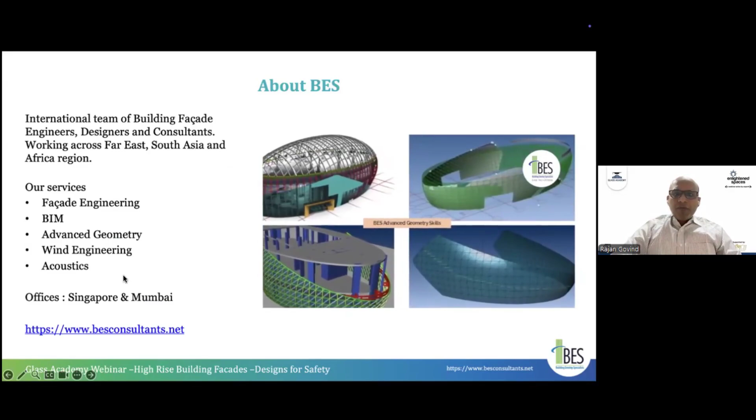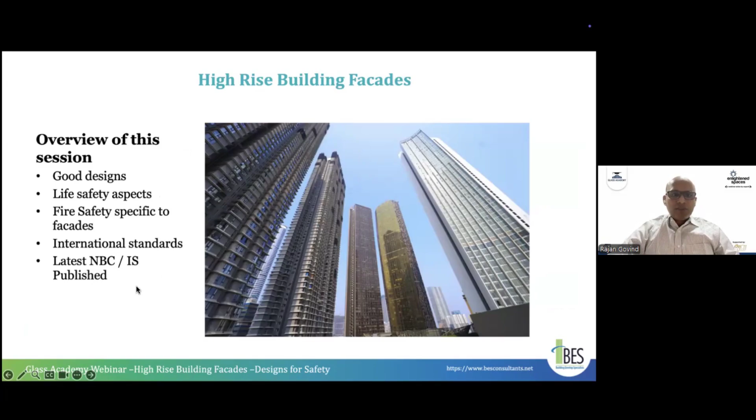So switching on to the topic of building facades, what I try to capture in this session, as much as possible, is the safety aspects. What is called a good design, and some life safety aspects. What is fire safety specific to facades? I will try to show some standards, which is a local standard, and how it compares to other international standards. So understanding safety has several aspects.

Safety is not just from a structural engineering point of view. Safety also comes in many different forms. It's human life safety. When we say safety, the first thing we realize is structural engineering, which is driven by the wind forces and connection design, especially for facades, and it should be structurally robust. The design should be robust.

We also see a risk in falling objects. Things falling from high-rise buildings pose a risk to the pedestrians, occupants, or the surroundings. And occupant safety, which is about protecting the occupants and users the building is built for. And another important aspect is fire safety.

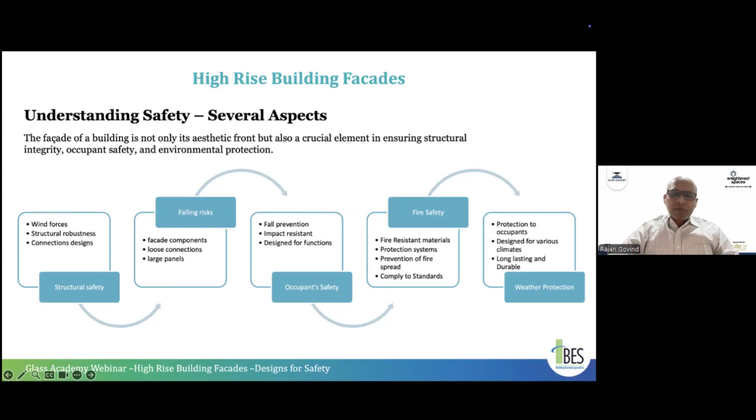With fire safety, we often hear about problems with building fires, and sometimes people have a perception of fire risk on the facades. And we also try to capture some of the weather protection, so how the facade is helping to protect against weather challenges.

The first thing on the facade aspects, we all talk about structural engineering. The structural engineers know the major predominant force on the building is the wind. So wind is a natural force, and it has a huge impact on the structures. So the better we understand the wind, the better the designers can design.

Often people see the wind as only happening on a high-rise tall building. So if you design a low-rise building, single-story building, ground floor building, maybe it's okay, I can compromise the design, the wind is not coming to the lower level. Which is not the case.

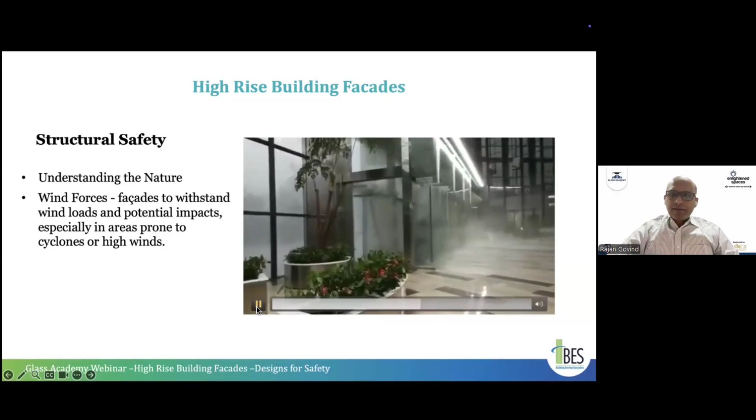Okay, so sorry for the noise. So the video clip is showing the impact of the wind. I can just now mute this so I can replay this.

You can see the wind is on the ground floor entrance of the building. So things get blown away. The doors are falling. The glass is breaking. So the phenomena of the wind is huge. So it doesn't matter if it's only a high-rise building. It is on every building.

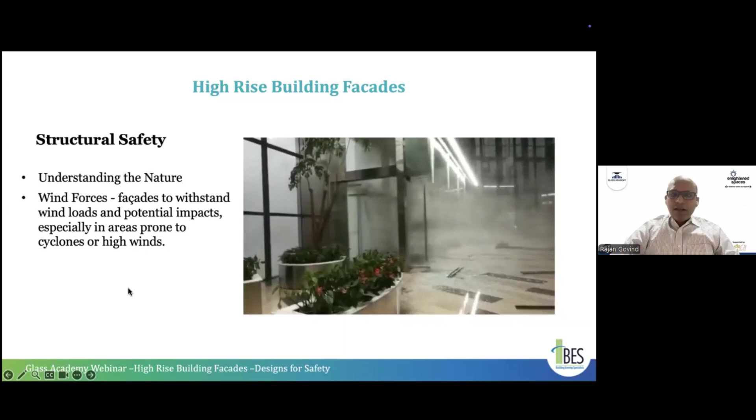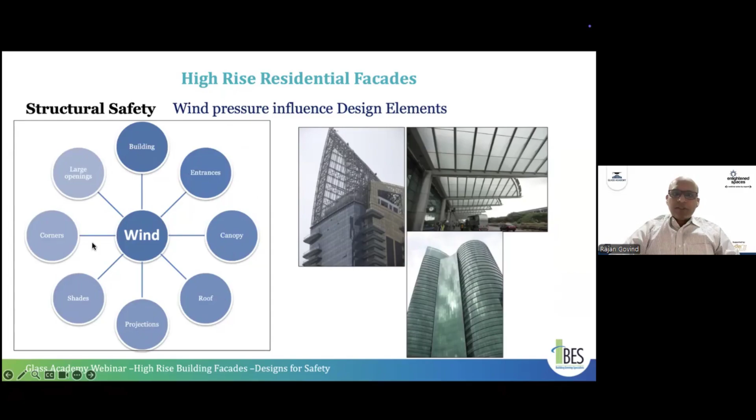The wind also creates a lot of other secondary impacts on the building on various locations such as entrances, canopies on the entrance, roof, terrace, projections. As we know, a building with a lot of projections attracts a lot of wind, shadings, corners, large openings like refuge terraces. On high-rise buildings, we have a lot of balcony openings, double height spaces. So this gives a huge challenge for designers to understand various aspects.

And for complex shapes, we also use a simulation based approach. The simulation based approach is good for complex buildings, where it can give a much better understanding of the wind forces on various parts of the building. For wind forces on a complex building, the simulation approach is also very well referred by NBC.

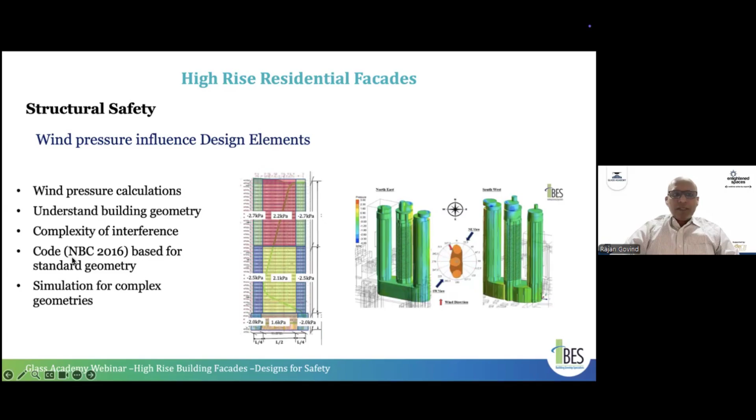In structural safety, we should also take care of fixing and connection. When we design for engineering, it is not just that we have to design a glass or cladding and member. Safety of the connections is very important. The facade elements are held by these brackets and fixings. Maybe the panels or one piece of glass may fail, but the bracket system fixing cannot fail. So there's a greater emphasis on fixings.

As a general good principle, you should transfer the load directly. You should be structurally efficient, and it should be designed for movements, rotation, all sorts of other impacts. Ease of fixing: it cannot be too complex for the person who is installing at the site, and the ability to interface with the building in a much cleaner manner so that it doesn't impact the architectural design.

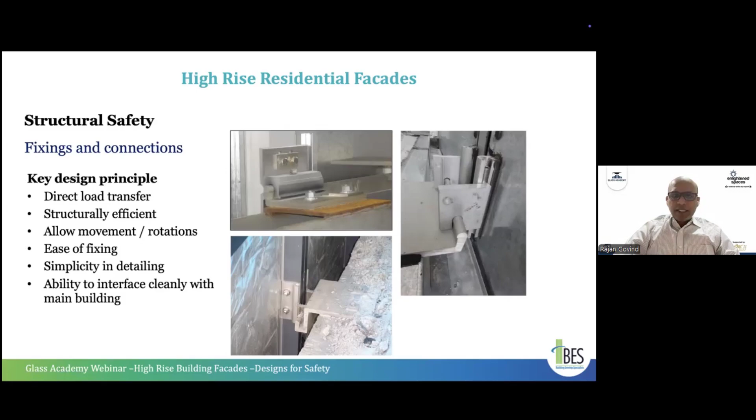And so we talk about a lot of fixings and connections in the bracket, because the facade is nothing but connecting various different materials together. So we always have a lot of different connections to deal with. And this fixing and connection should be designed to take care of the tolerances, whether a concrete building or steel building, how much tolerance the building has.

The framing system and fixing should be designed to take care of the tolerances; there is always a tolerance. So it is not as we design, as we get on the site. So the fixing and design detailing should take care of that.

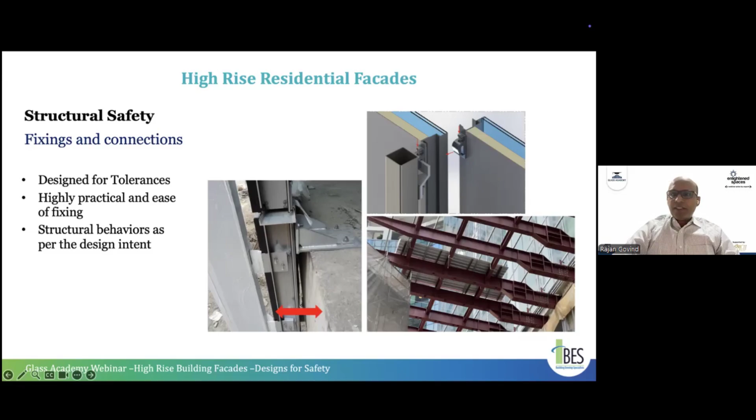And especially for high-rise buildings, we face challenges of inter-story drift. It's basically the building swaying due to seismic activity or due to high wind. The design methodology and factors are clearly given in IS code 1893. Generally we design the sway for H over 500. H is the height of the individual floor, and 500 is a factor of safety taken care of to design the joints.

So as the building is swaying this way, a joint movement has to be designed. Especially a high-rise building is not stiff. It's slender.

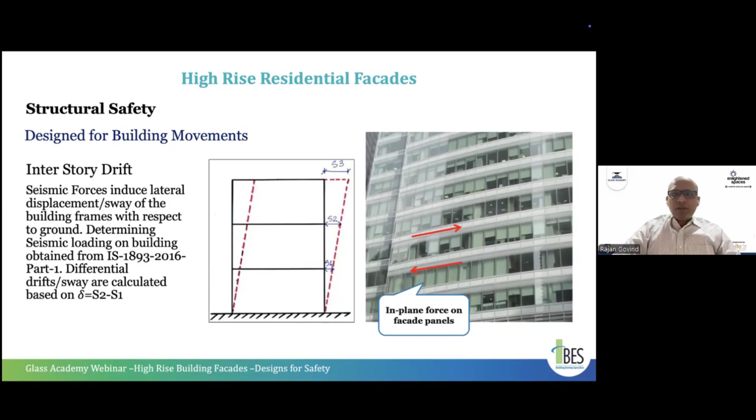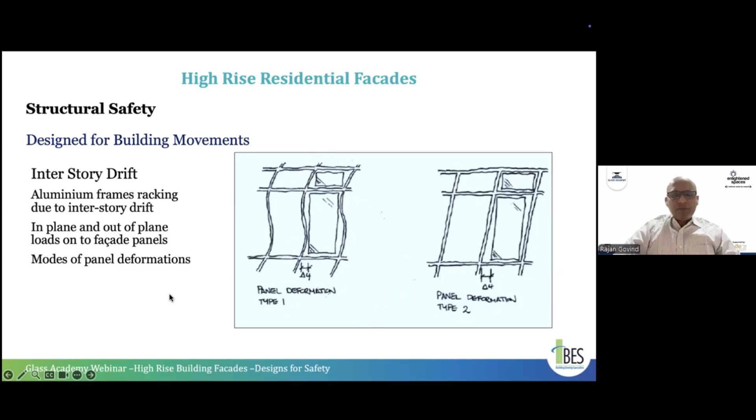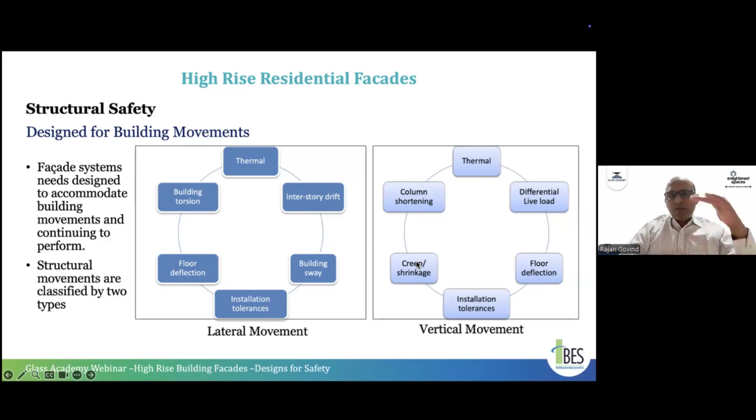And when we say vertical movement, the movements are slightly different. You have thermal movement, differential live load, floor deflection, installation tolerances, and creep and shrinkage, column shortening when the concrete structure has a vertical shortening effect. That all needs to be taken care of.

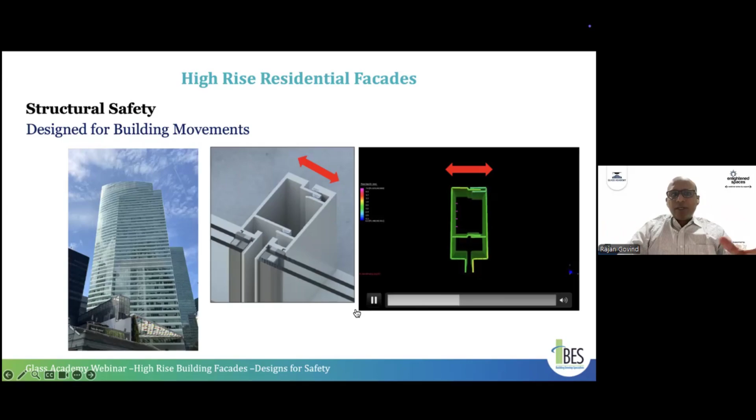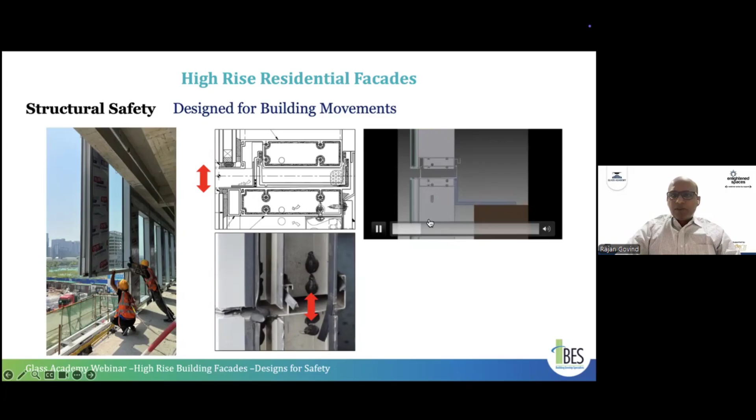And another movement we have just spoken about, vertical movement. When the facade panels are put on the face of the building, each slab is vertically moving in a differential load movement, where you can see the simulation on the right side showing how much allowance should be given to design these systems. So you can see there's a vertical joint here. This is how it gets constructed. So nothing is really stiff; the facade system on a high-rise building is very flexible. It should adapt to the way the main building is behaving. So you have a lot of allowance for vertical and horizontal movement.

And because the facade system also takes care of architectural design intention, we can't just detail it like other structures we do, concrete or steel buildings. So we need to take care of how the detail is consistently shown as per the architecture. There are various ways we can do the designs, like an open joint or a different expression, a capping expression. We should make sure these joints are an aesthetically pleasing design.

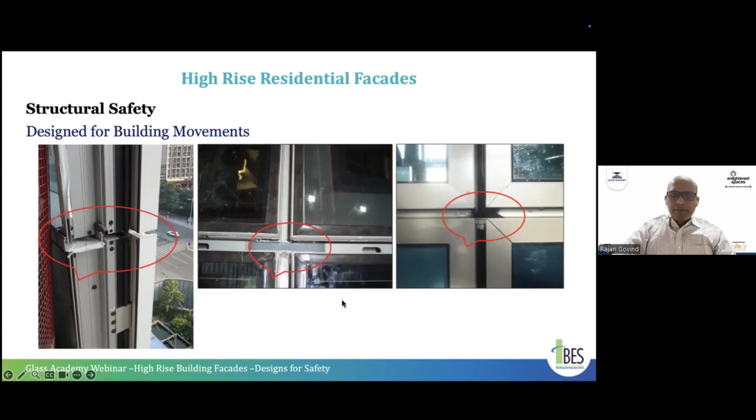So then we move on to different aspects of falling dangers. Sometimes it comes in the news that something is falling from a building due to heavy wind. But as engineers, we don't just accept that it fell due to heavy wind. It is supposed to be designed for any type of wind. So falling in any type of wind, even extreme wind, is really not acceptable. Falling dangers generally come from projections of the facade, maybe windows, fin cappings, sunshades. There are so many attachments on the facade. So unfortunately, things are falling.

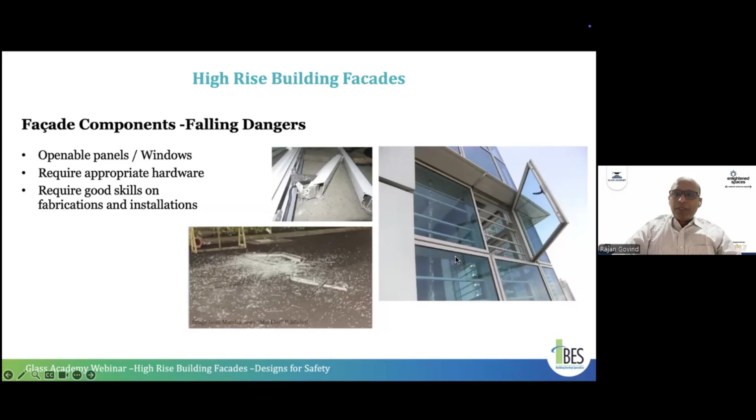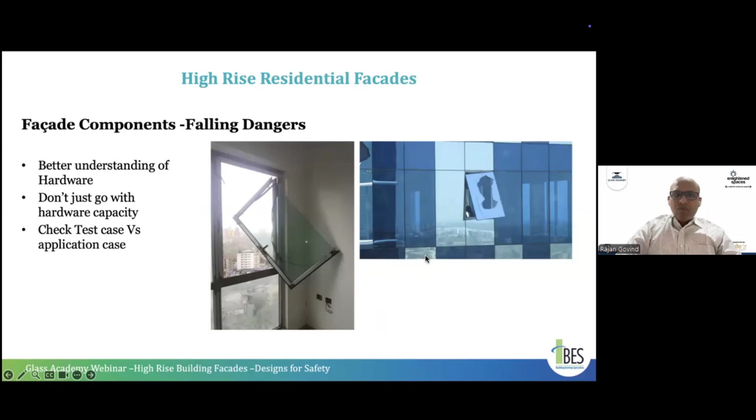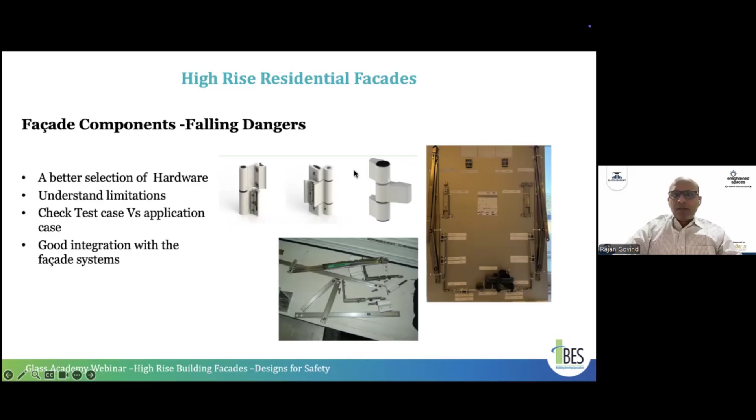The main aspect is falling windows, which we generally see on high-rise buildings, especially in Mumbai. Every year in the monsoon, we see windows falling, especially because the hardware is not appropriate to suit that particular type of window. We see these things broken and dangerously dangling on the building. It can fall anytime. These are falling risks from high-rise buildings. There is a solution. It is not just a risk because of heavy wind. The hardware has to be right; sometimes we use smaller or bigger hardware. It should be designed and engineered for that purpose.

And there are other things that can fall from the building, like broken glass. Glass will break, as we all know. But we have to consider what happens when it breaks. It should stay safe in place, or it should fall somewhere with no risk to pedestrians or occupants. So that's the purpose of the design.

And you can see the clip on the right side. There's laminated glass falling from the edge of the building. It is still laminated glass, so it's supposed not to fall from this level. It should stay in place, but it has fallen off. So there is an inherent problem with the design, or after the glass breaks, it's not able to hold.

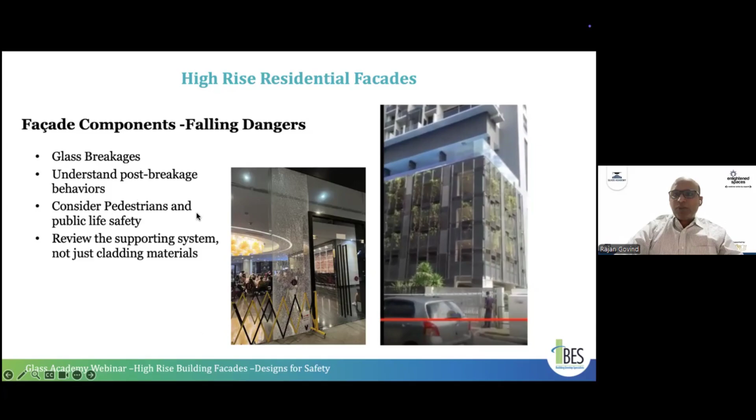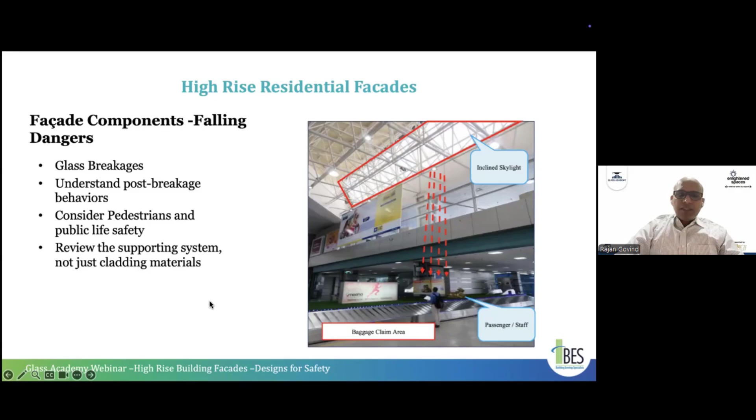So if the glass breaks, it should not fall. If it should not fall, that means they have to use a safety glass. The glass is available, but they have not used the right glass. So there's a sloping glass. If the glass breaks, it's just showering around this area where pedestrians or the public are using this space. So we need to see the risk of falling and the impact on life safety. Not just glass, things could fall off from the building.

Some video clips taken from somewhere else show what we often see whenever there is heavy wind. Now, due to the weather change, this heavy wind phenomenon is happening frequently. Before, we used to have this heavy wind maybe every 3 or 5 years. Now we almost see it every year. Not just one city, we can see it everywhere. In the video, we can see that things are falling because they're not fixed properly. It's not designed, it's not implemented properly.

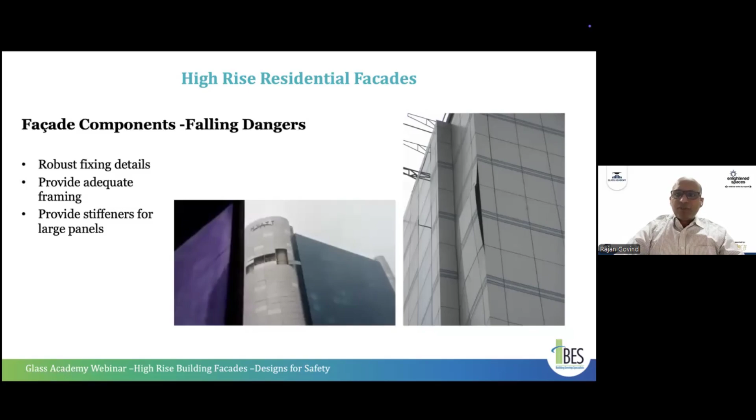A lot of ACP or cladding panels are very widely used. Sometimes it's not engineered, it's not detailed. There's not enough attention. The engineers sometimes just think about the panel thickness: I use this thickness and it's okay, but they're not considering how stiff it is. And we see this falling danger mostly happening on these cladding panels, being ACP or other cladding. This picture is taken somewhere, maybe from the airport.

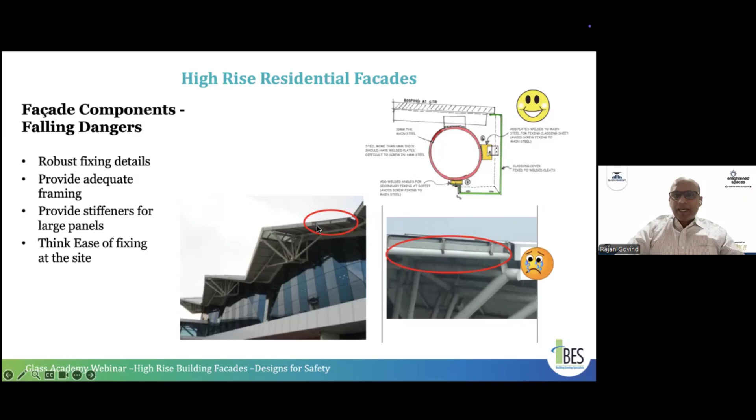There is not enough attention given to how we detail this. This cladding panel should be fixed properly. There's no fixing information. It's not stiff enough to be in this place. And when the wind is blowing, especially at the corners and fascia, you'll have extremely heavy wind. These small pieces fly in the air and pose a significant risk to the occupants.

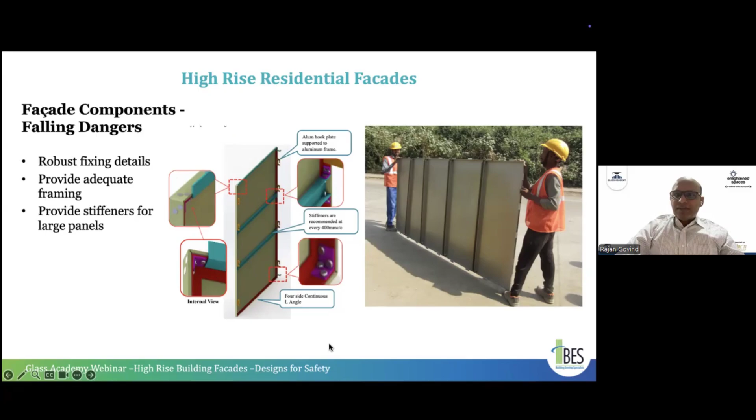These are missed-out designs, or adequate care was not taken in the design. If you take this much care, with any amount of wind pressure, extreme wind, even 240 kilometers, 300 kilometers, it's supposed to stand in its place. It's not supposed to fly. The problem is it has not been designed, it has not been implemented. As you can see in the panels, there should be enough stiffeners here. It should have a fold. All the corners should be stiff enough. So much detail should be done properly. Then it will stand there for any amount of wind forces.

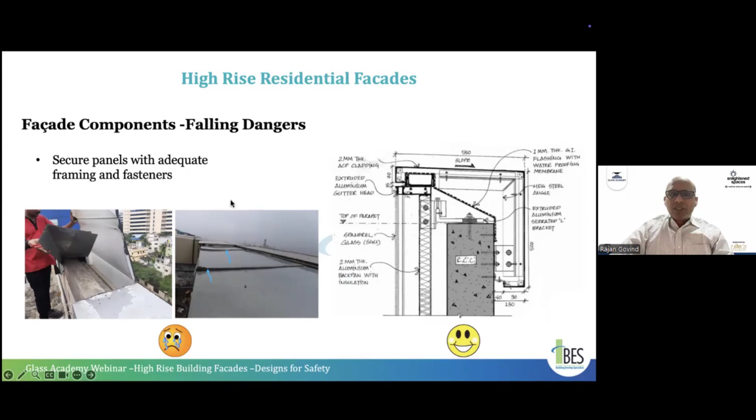I'm continuing with this because we see a lot of falling danger, especially on cladding panels and roofing areas. This picture shows somewhere in the terrace area. Usually things get blown away and fall off the roof. You can see the sheets are not fixed properly. It's supposed to be engineered. There should be some framing behind to hold the sheet. But these sheets are just laid there and screwed somewhere, and they start falling. So the panels are not secure. That's a problem with this kind of fixing.

And the designer should be taking care of the anchorages, especially in the facade. We use different types of anchors for various substrates, sometimes RC wall, brickwork, hollow brick, lightweight brick. So there's always a solution available. The engineers or designers should be mindful of using the right anchors and understand what the supporting structure is. It is not just one solution. Every building is different, so engineers and designers should take care of different types of fixings.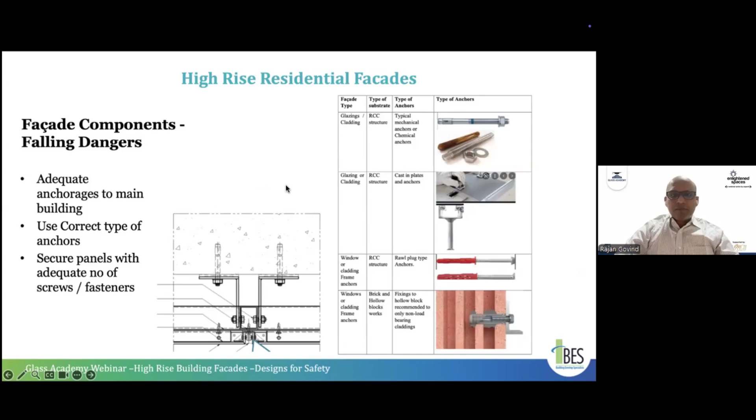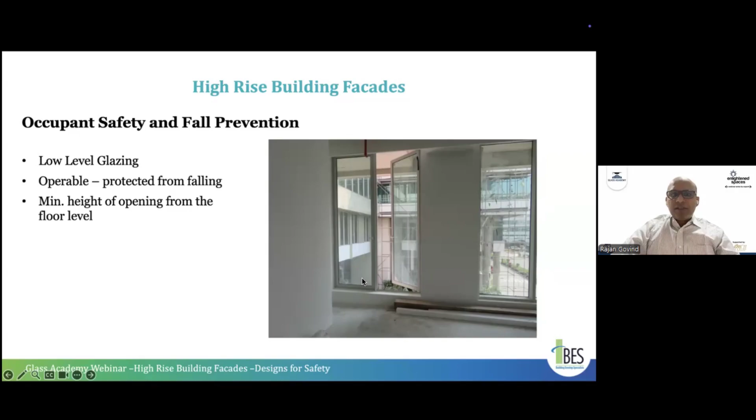Another aspect of risk from the occupant perspective: for occupants inside the building, there is a risk of them falling out. Often we see windows at a low level. There's supposed to be some guardrail, or some restrictor allowing a restricted opening, which is not there. So these are all risks of falling, not complying with the standards. The standard always gives a minimum height, and all low-level glazing should be protected with rails.

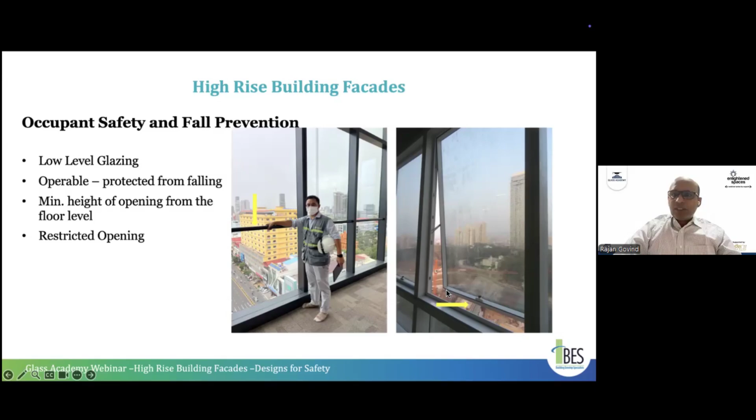Whenever the windows are opening, they should have a restrictor, so you cannot open them fully. You can only open to the standard, say 75 to 120 millimeter clear opening, so that it is safe to open and nothing is falling from the buildings.

The glazing which is happening on the low level has a human impact below the sill level. So the sill level, say maybe 1 meter from the floor level, all the glazing below the sill level should comply to some safety standards. Especially NBC 2016 Part 6 Section 8 is meant for glazing, and has given a table which I'll show you on further slides. It has given various criteria.

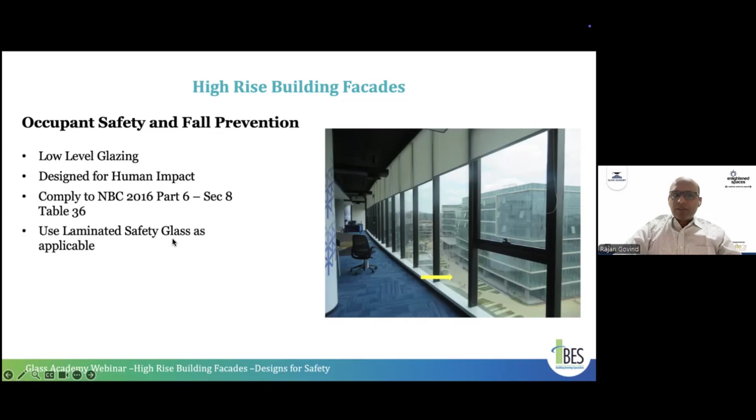What glass type should be used? How do you protect the glass which is subjected to human impact? So basically, you should use a safety glass in the low level areas. And railing. Railing is a key component of the building which is often ignored. Minimum height is not followed, or where should I measure the height?

The height should always be measured from where you can access. So it is not from the floor level. There's sometimes a ledge, or maybe a small curb wall or toe wall. So the height should be referred from the highest point of access. A child can climb over, somebody can stand on it. So is it enough height so that it is protecting the occupant? So the height of railing should be considered from the highest point of access, not just from the floor level.

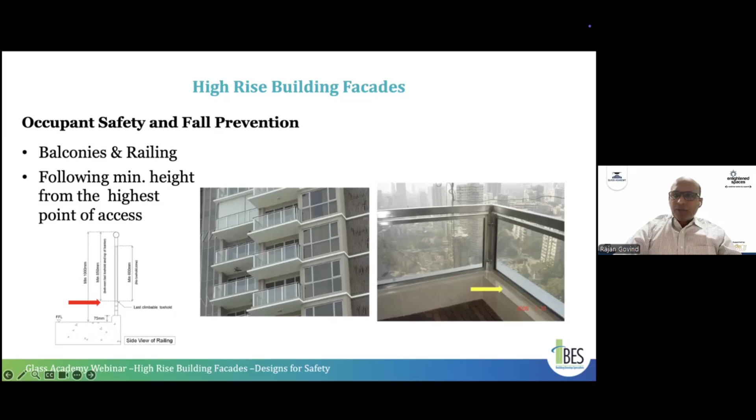We could also see a lot of things are dangerously at risk with glazing, because architectural design is one thing, but as an engineer designer, whenever they design such things, they should take care. It may look good, and there is nothing wrong with the design as long as it's implemented properly. We can see this frameless railing very widely used on buildings where sometimes the anchorages fail. You can see in the video clips that on this particular building all the anchor points have failed. These are a significant risk to the occupants and those around the area, like pedestrians.

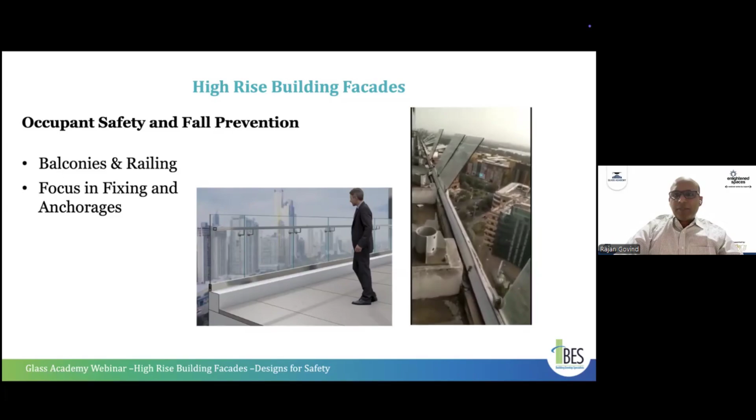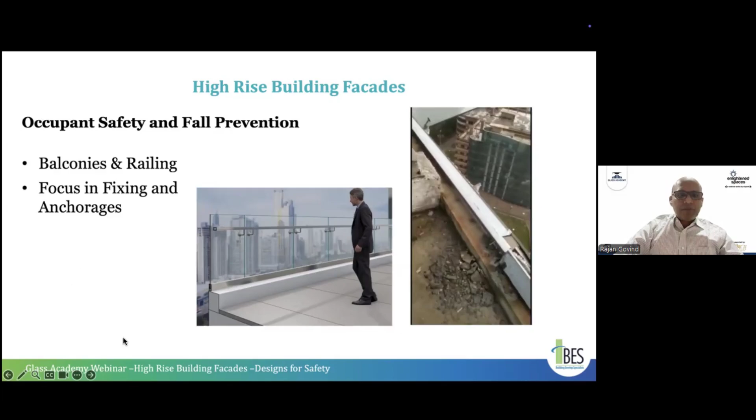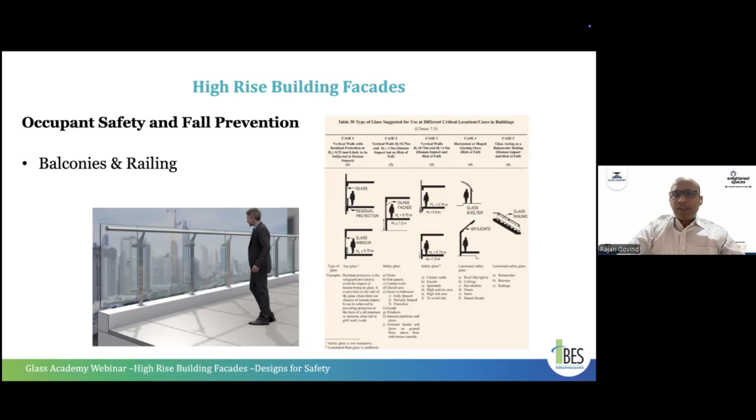What is the correct type of glazing to be used. There are so many things covered in this table. It also covers residential facade, commercial facade, various different types of facade. So it's a very important table. If the design is compliant to this table, we can say it is complying to fall prevention for occupants and pedestrians and all other aspects.

We now move on to the fire aspects. I'll give a little bit of introduction. Whenever there's a fire, often the facade gets blamed. It's not true, but we need to see the impact of the fire on the building. There are various news reports throughout the world. We have been seeing buildings on fire, mainly the cladding material.

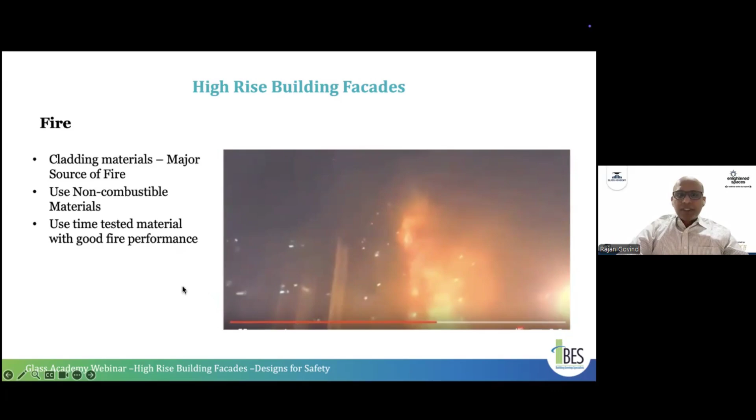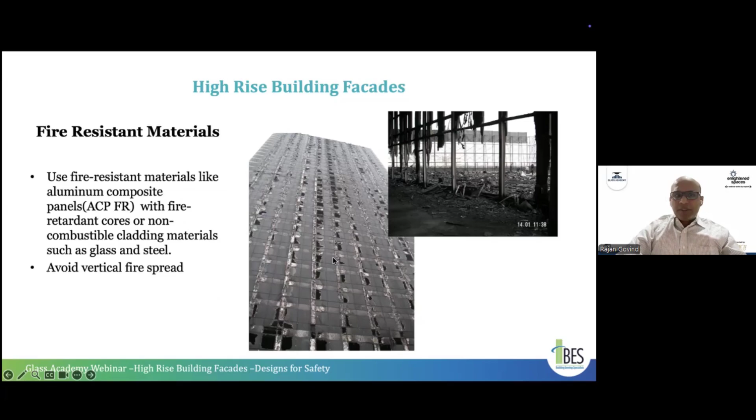There's a lot of cladding material used, especially done 20 or 30 years before, or sometimes even on recent buildings, where they don't use compliant material. They use non-compliant material. So that poses a huge risk of cladding fire on the building. This is a completely burned out building. You can see they have not used a proper fire rated cladding. There's a fire rated grade of composite panels, and it immediately spread throughout the building because it doesn't hold the fire. It spread vertically.

There's always a solution. There's a solution which works, and there's a solution which has no safety. Cladding material should comply to certain standards; these are internationally well recognized standards. Whenever we see a material, we look for this standard. If the material is compliant to a standard like EN 13501, class B-s1, or Part 6 standard class 1, the material is good to use externally.

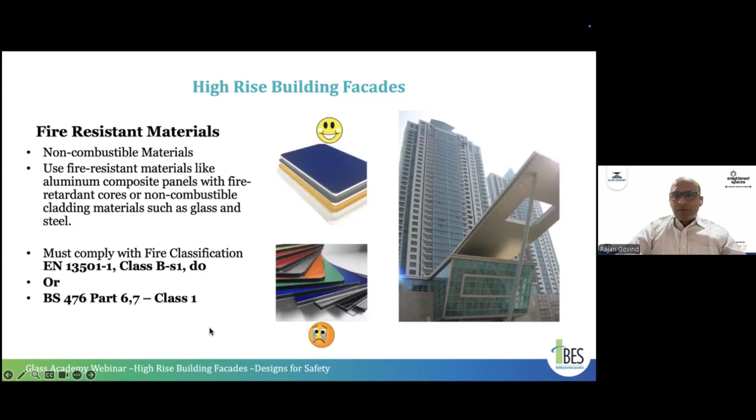And especially for cladding material, we have fire rated panels or non-fire rated panels. In the panels you can see, the black color core is a highly flammable core, and the fire rated FR grade composite panel has a white color core. So we can differentiate them. There are solutions available, so one has to be mindful of using the correct material. And we often do the testing and evaluate the risk, not just relying on the certificates and standards.

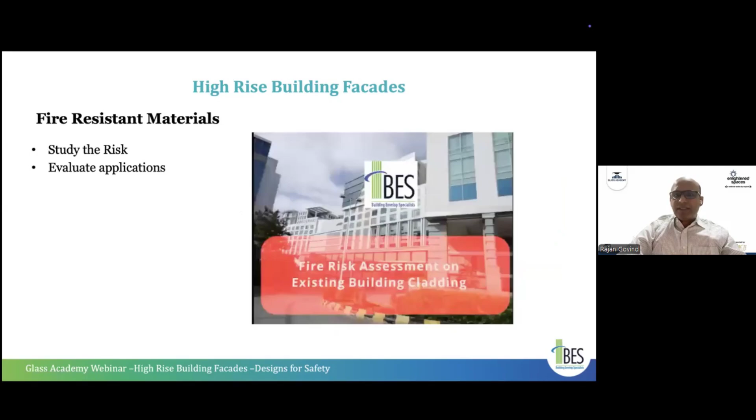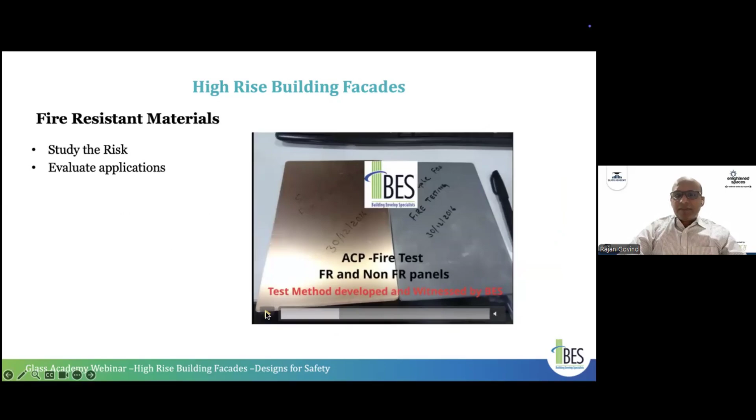So this is one risk study we have done for an existing building, because a lot of existing buildings use these ACP cladding materials, and not necessarily everything is compliant material. So sometimes we assess the risk and advise the client.

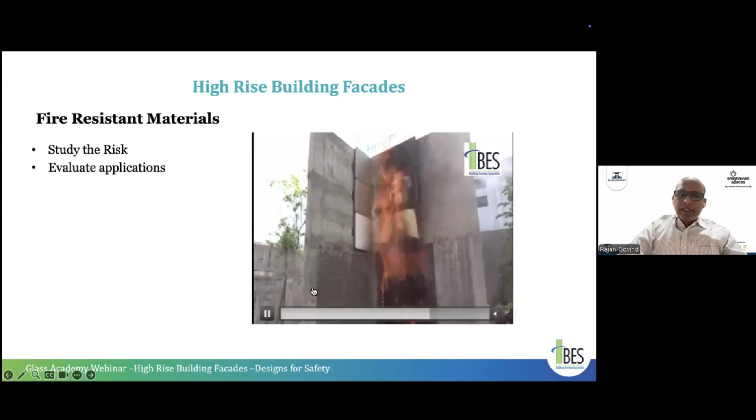Sometimes we go for testing. What is the risk associated with the existing building? And what is the fire spread or smoke spread? Do they have to replace, or can they retain, or can they do some mitigation measures? So we have to evaluate the application where we are applying.

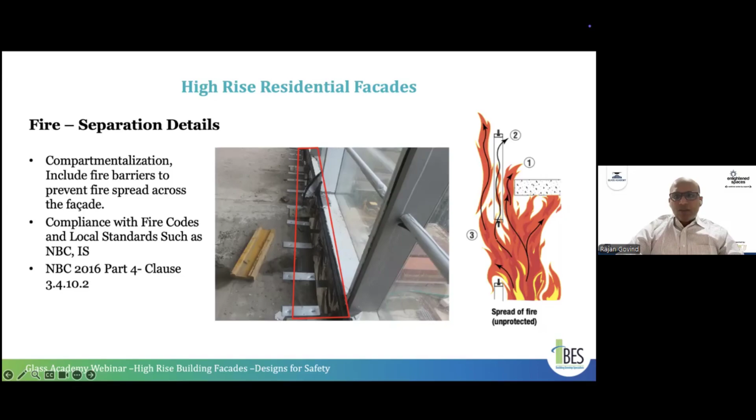If any fire happens on the lower floor, it should not spread to the upper floor. So that is called the fire separation detail or compartmentation detail, so it is not spreading above. For that purpose, this detail should comply with the smoke seal and fire seal as per NBC 2016 Part 4, Clause 3.4.10.2. So if somebody is detailing this and complying with this, there is no issue of fire spreading vertically from one floor to another floor.

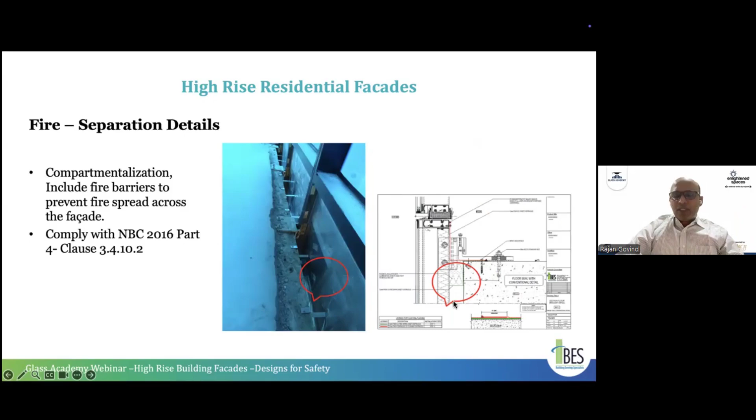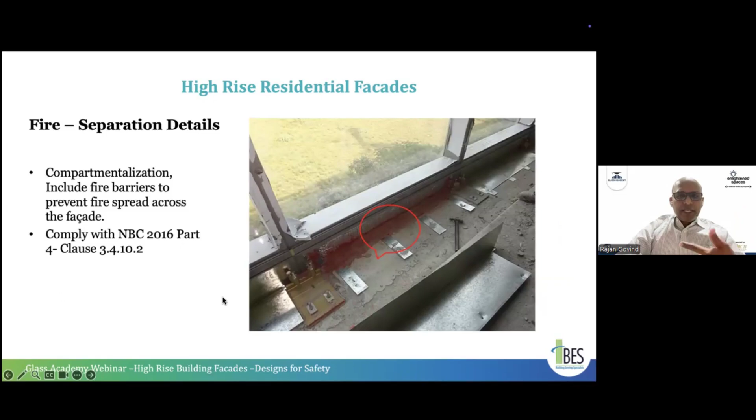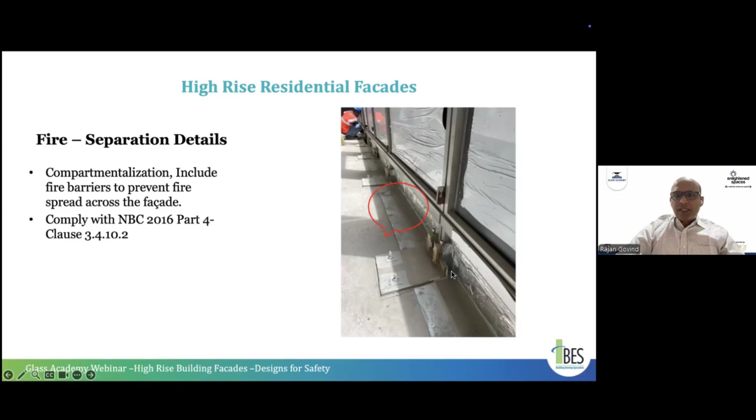In continuation of the same detail, if the detail is done correctly, there's no way the fire can spread from one floor to another floor. So it's compartmentalized. These details should be followed, it should be sealed. And we often go and test this detail on the actual site, whether the detail is working or still posing a risk. This is a finished detail, it will look like this. So any fire below is not really coming to this floor; there's a fire separation detail.

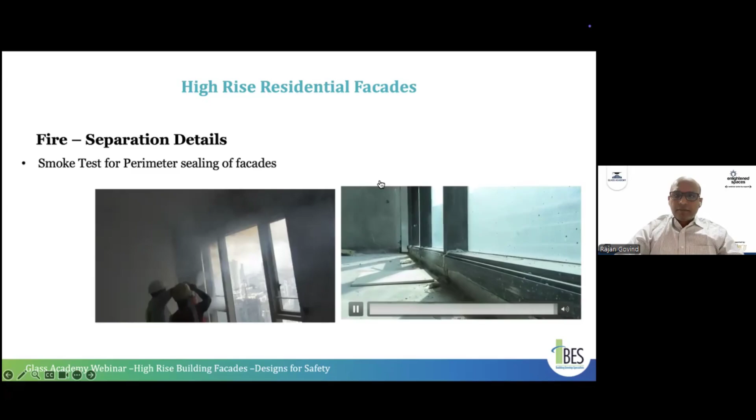Yeah. So the other aspect of fire: we spoke about fire. Now what about smoke? In a fire, there's also huge smoke accumulating on the floor. We need to make sure the smoke is evacuated. For that, again, the code has given various options. So you need to provide some windows. There are two types of smoke evacuation. There is one window which is called a smoke vent. What you see here: when smoke is happening, if these windows are motorized and connected to the building management system, they open automatically and the smoke is evacuated.

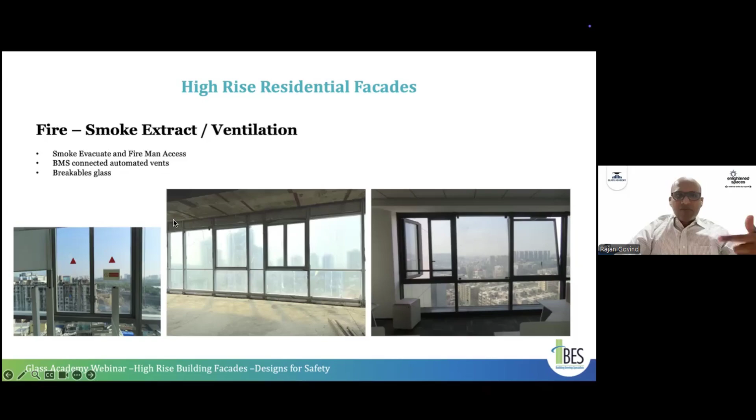And there are also side-open windows. This is basically a fireman access window. These windows can be opened by the firemen from outside. This is especially given for high rises in Mumbai. So the firemen open the window and they evacuate. There's also another way, breakable windows. This is widely used and is recommended in NBC. So we give openable windows, breakable windows, so the occupants or the firemen can break them open and the smoke can evacuate. So all these options are given. If the design follows these principles, there's no risk of fire.

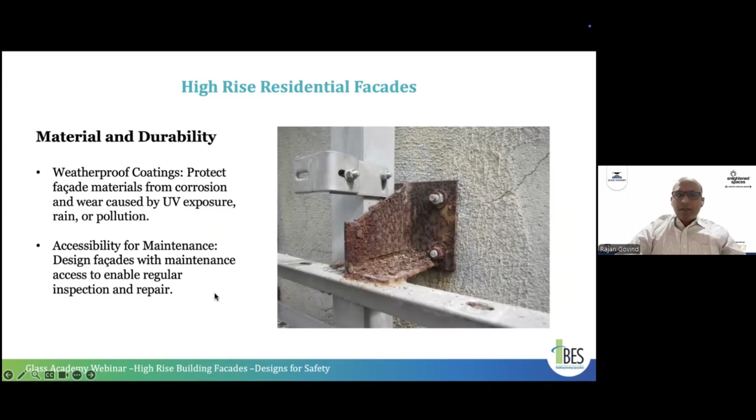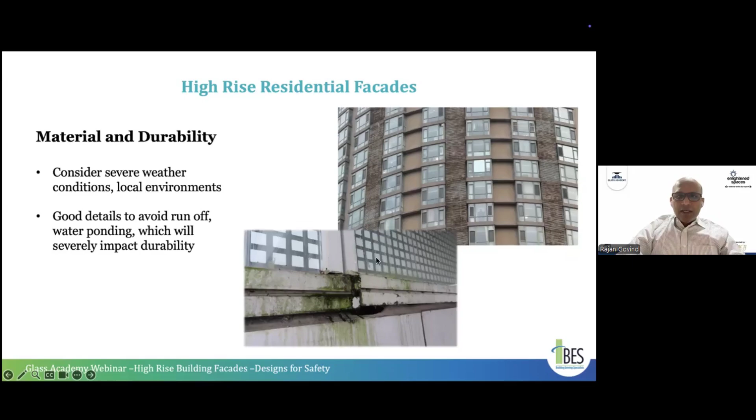We move on to material. The material and durability should be taken care of so that the facade is long lasting, not just what we see outside. There are things inside, connections, brackets. They're not visible, but we have to make sure they're not posing a significant risk. In the detailing, sometimes mechanical equipment causes problems with the facade. So we need to make sure there is no water running off. The detailing should be done at various locations of the facade, especially if you have projections, so that the water runoff can be minimized and it will extend the facade lifespan.

And there are various ways we can protect the facade system, material or components, like hot-dip galvanizing for all the steel structures. And whenever a good finish is needed, we need to give a paint system. Hot-dip galvanizing is the best form of protection. And we can also have a 3-coat architectural finish wherever the system or members are exposed.

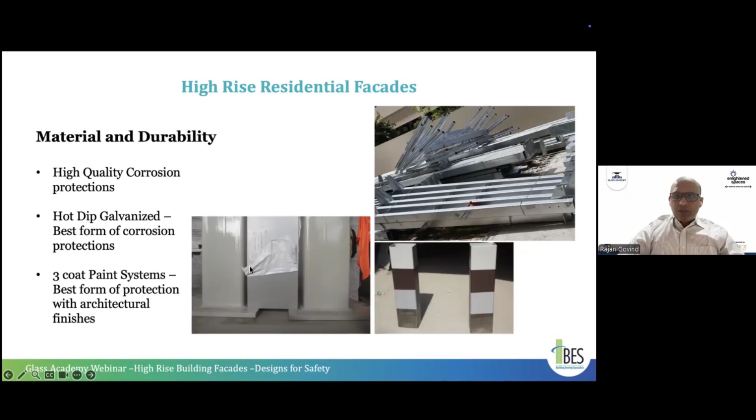I'll just say something about the weather aspect, which is causing a huge challenge to occupants, because every year we are seeing the rainfall getting higher and the intensity higher, and it's all wind-driven rain. Especially for high-rise structures, we have a challenge of wind-driven rain.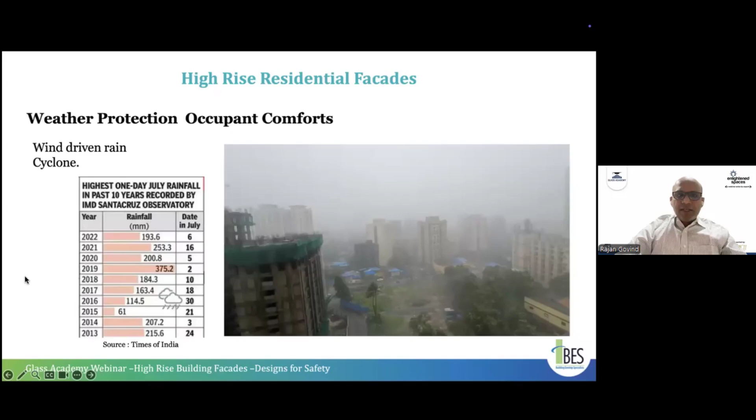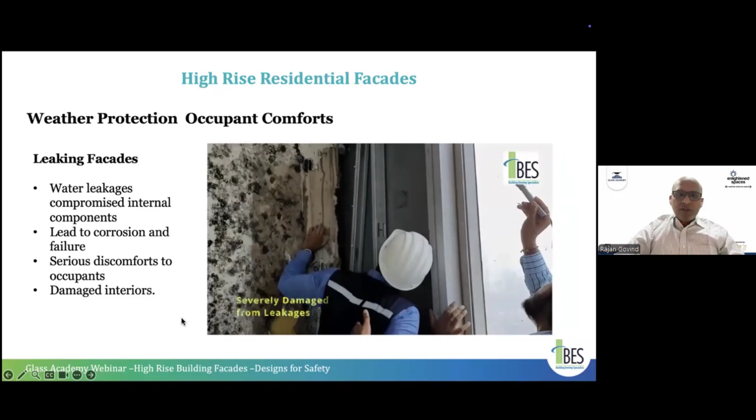This is just showing the intensity of the rain when it comes to the wind. Then that's challenges to the facade. So in these couple of slides, I'll try to show you the challenges on the facade, especially the leakage problem we often see due to heavy rainfall and wind-driven rains.

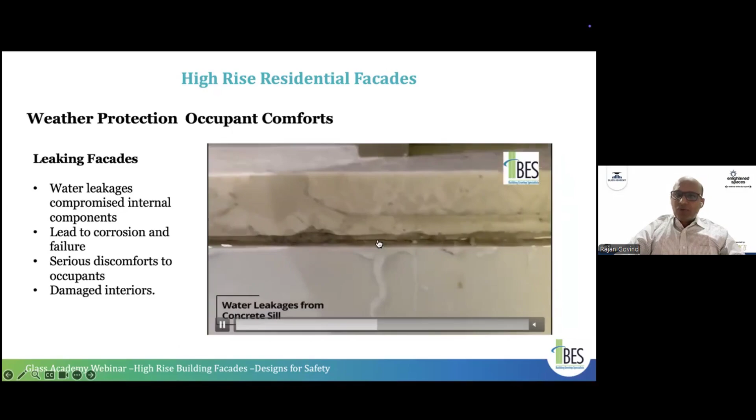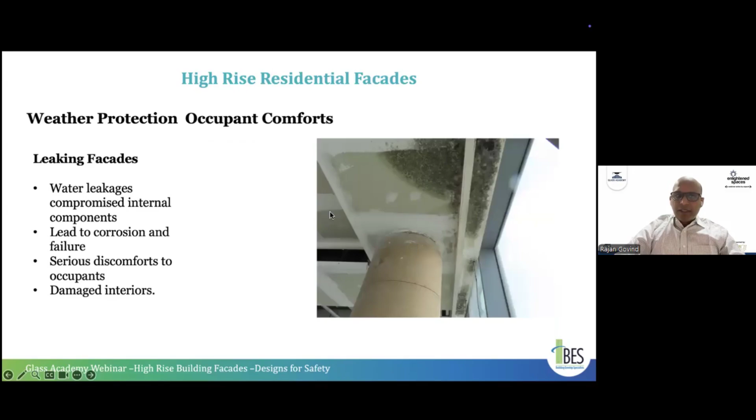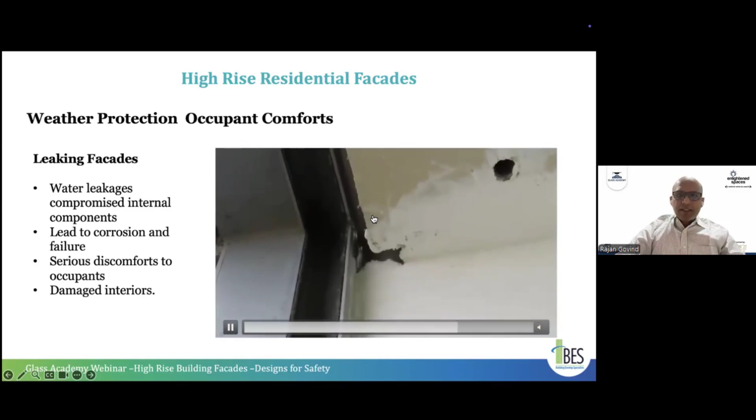So there is a lot of detailing that should be taken care of. Sometimes maybe structural civil works detailing is done badly. Water may be leaking from the concrete structure, not from the facades. And this partly may be a design problem, or not implemented properly, or it's not detailed enough. And yes, it causes serious damage to the interior and the building value is diminished drastically. So when we have a leaking facade, the water is leaking and then it will spoil the interiors.

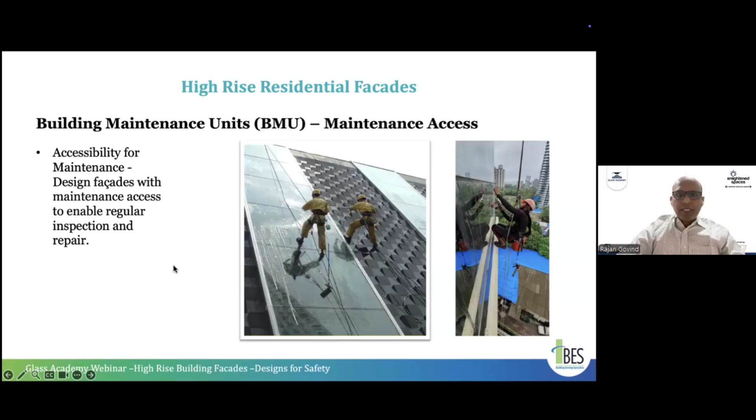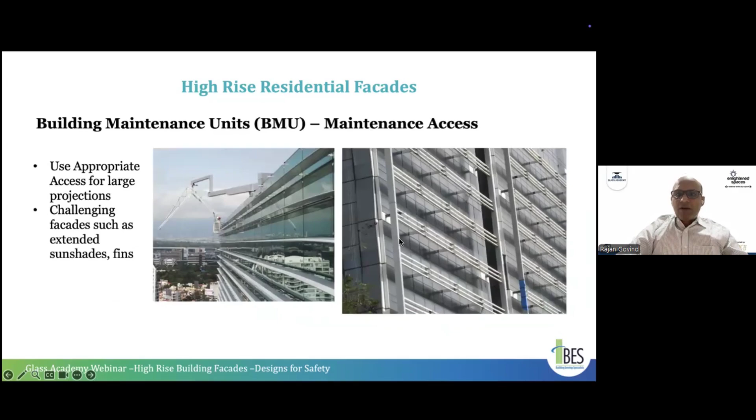And then we need to speak about facade maintenance. Any facade, we need to make sure it is maintainable, cleanable, and it has to be good looking for its extended life. If it is not able to be maintained or cleaned, or a defect is not fixed, then it poses a dangerous safety risk. So any designer has a responsibility to make it maintainable and cleanable. There are various ways it can be cleaned, especially if you have a facade with a lot of projections. There's a system available which has an extended arm and a sophisticated system for cleaning.

In these slides, I'll try to show something about maintenance access, not just for cleaning. This is sometimes ignored by the designers. How do they maintain the building? How is the air conditioning fixed? How are they going to service this building after it's completed? So I just took some inspirational videos.

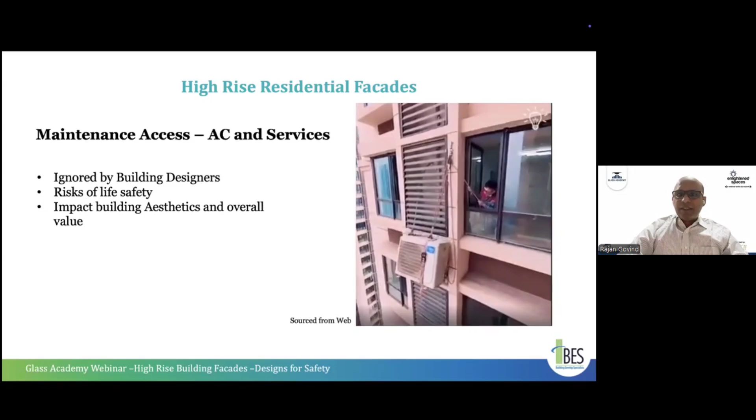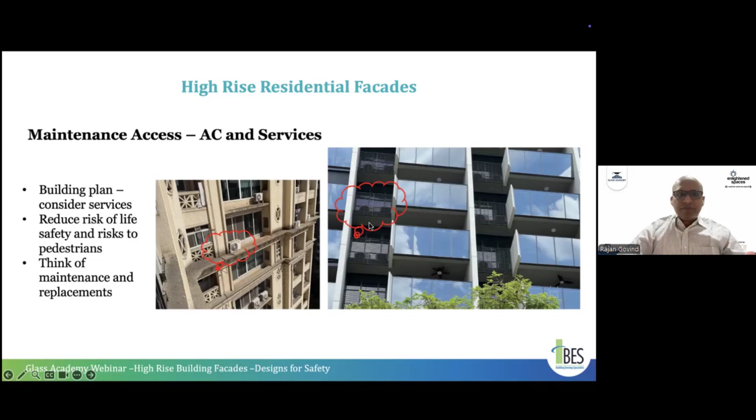But these are all like forgotten problems, never thought about, and it has a negative impact on the building aesthetics and overall value, and it's not a good design. And most importantly, it poses danger to the pedestrians. We can see the air conditioning is just fixed on the ledges. In the picture on the right side, you can see enough thought has been given, so it's safe and it's properly designed.

Just coming to almost the end of the slides. So there are a few points I would touch base on. Myths of the facade. Often we see facades blamed for causing problems, fire risk, and other things. So this is just news I picked up from the latest news. There's a fire in the building, and you can see sometimes the glass facade is blamed for the fire. Smoke is not able to evacuate. When you see in detail, this is actually a clip from the website. The comment shown here is: a major drawback of glass facade buildings is the smoke does not have an outlet, and it goes unnoticed.

But then again, finally, what we found as the real fact is the main active fire protection system, the sprinkler system, was not working. So the facade is unfortunately getting blamed. It's that the active firefighting system is not working.

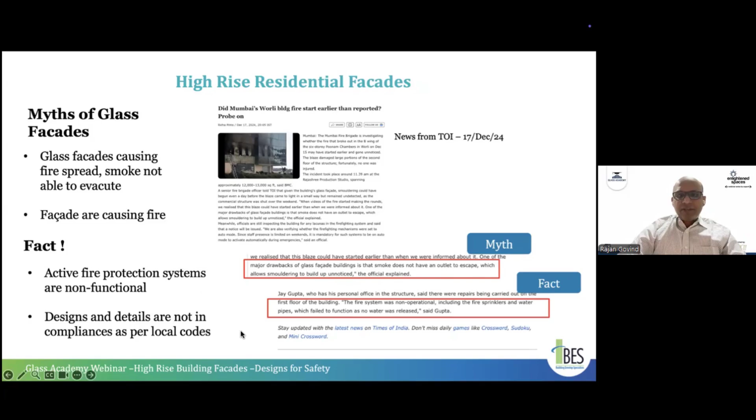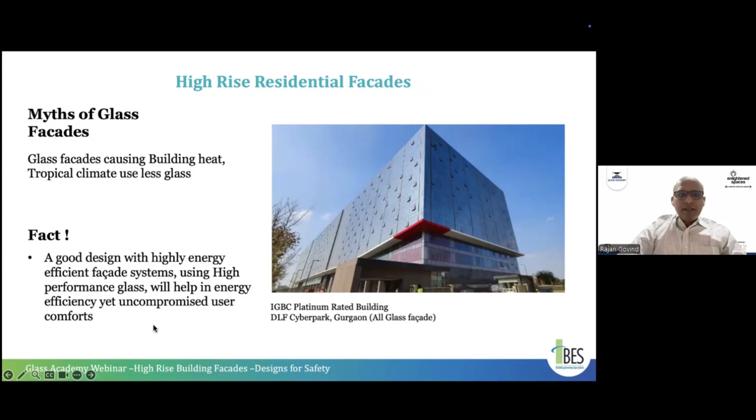And there's another myth that a glass facade is going to cause excessive heat, and we should not use glass, especially in a tropical climate. The picture on the right is an IGBC Platinum building. That's the highest rating we can get. The actual building name is given, and it has an all-glass facade. The building has achieved Platinum, the highest rating. So the fact is, if the design is taken care of, there are various high performance material options. If enough thought is given, there's always a better solution available. So thank you.

Thank you, sir. This was an insightful and comprehensive presentation on high-rise building facades, safety by design. Your presentation provided immense value by decoding the critical aspects of facade safety, including good design principles, life safety considerations, fire safety specific to facades, international standards, and the latest NBC and IS publications. It was enlightening to see how thoughtful design, coupled with adherence to safety codes and innovative practices, can create facade systems that are not only visually striking, but also safe, sustainable, and durable. We truly appreciate the depth of knowledge and the real world examples you shared today, offering our audience actionable insights to integrate safety as a core element in their projects.

So, to further our understanding, we would like to take this opportunity to ask you a few questions. Sure, yeah.

The first question is what you already spoke about in your previous slides about some of the common misconceptions or myths. So one of the most common myths around high-rise buildings is that, like you mentioned, glass facades are unsafe, especially during fire incidents or structural failures. Could you elaborate on how glass, when designed and integrated correctly, can actually enhance safety, and why the real issue often lies in overlooking essential design?